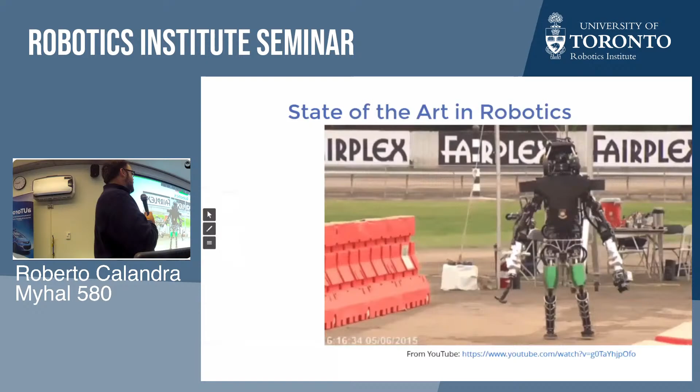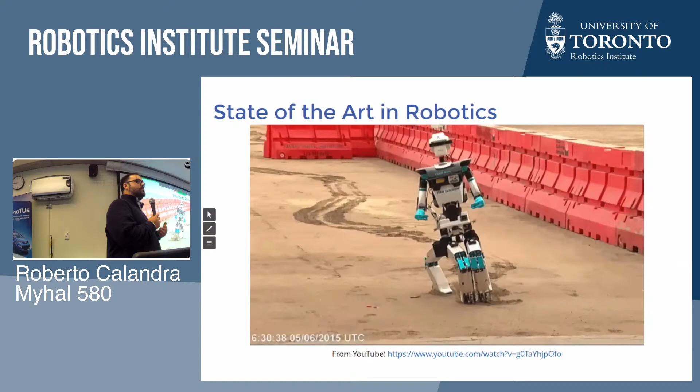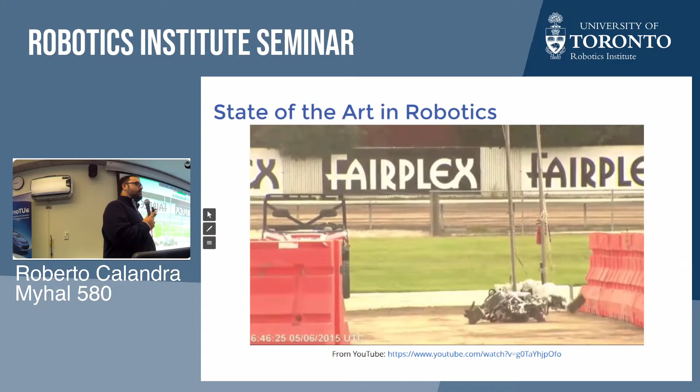However, if we look at what is the state of robotics nowadays, this is a video taken in 2015 from the DARPA Challenge. The DARPA Challenge, for those who don't know about it, was the most competitive robotics big challenge, and there were dozens of the best teams in the world spending years and years, in some cases with teams of hundreds of people, working on having these complex robots essentially be able to solve some sort of task and go through some sort of path with different obstacles.

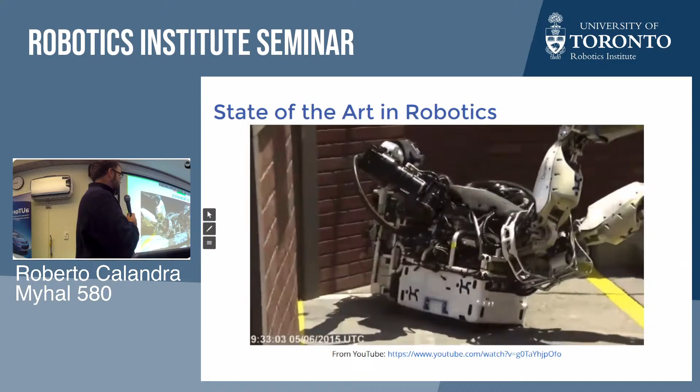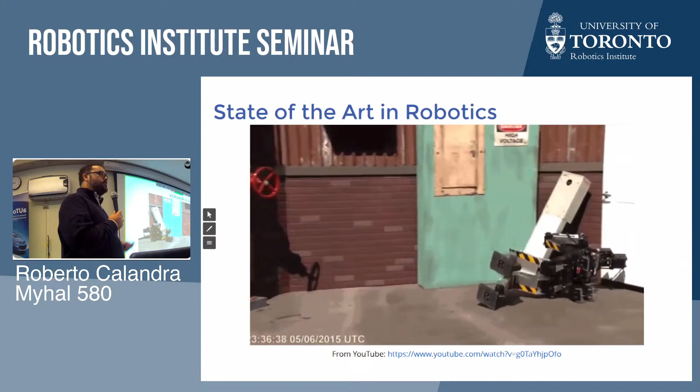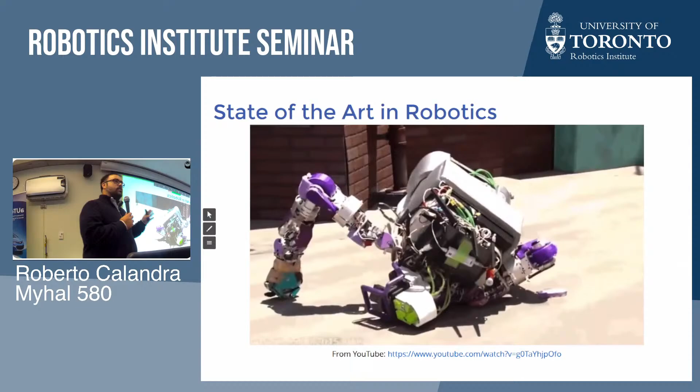And if we now look at this type of robots and their behaviors and their failures, this is qualitatively stupid. Any kid that is 3 years old is not going to fail in this type of silly ways as these robots are doing. And now all of these robots are really the state of the art of what we can do today, meaning 5 years ago. But how can we move beyond that?

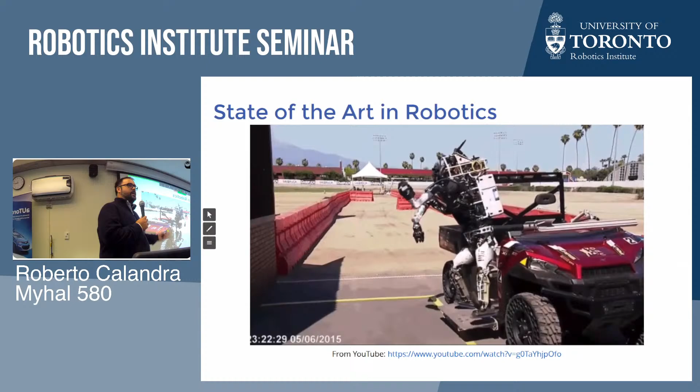How can we have systems that are more intelligent, are more adaptive, and can do better? I believe that in order to have robots ultimately being used in a wider number of environments, including homes, we need robots that are capable of adapting. We need robots that are more secure, that can interact in a meaningful but also safe way with humans. My personal opinion is that machine learning is an excellent tool to go beyond the state of the art and make robots smarter and more useful in the real world.

There are a number of challenges we need to address to achieve this type of high-level goal. These challenges are spread, in my opinion, across the whole spectrum from hardware to the control scheme we use, to the type of high-level planning and software we employ for decision making.

Some of the topics I'm generally interested in include multimodal sensing, hardware design, and adaptation to new tasks. Some of you might be familiar with my work on model-based reinforcement learning, but today I'm instead going to talk about a different topic, which is touch sensing, as a way to include multimodal sensing and provide robots with more information about the world in which they operate.

So let's talk about touch. Touch is probably the most important sense that we use in our everyday life, although we barely realize it. Touch is not only the most ancient of the senses that developed throughout evolution, but it's also the sense that allows us to measure forces.

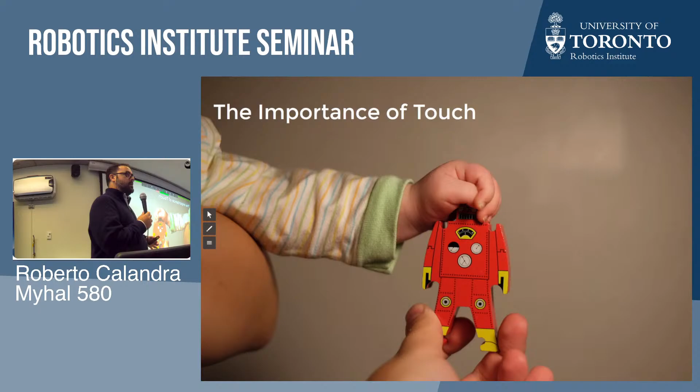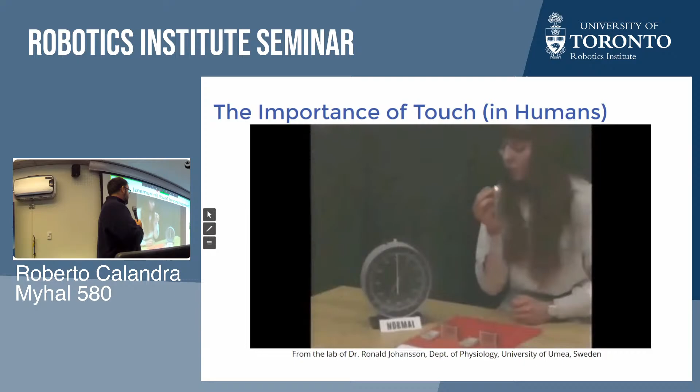We have a lot of evidence from physiology that touch is important in humans, and without touch, we fail. This is a video from Ronald Johansson's lab, where they would ask people to solve very simple tasks, and then anesthetize their sense of touch while keeping their motor control capabilities. Suddenly, very simple tasks like lighting a match would become extremely difficult.

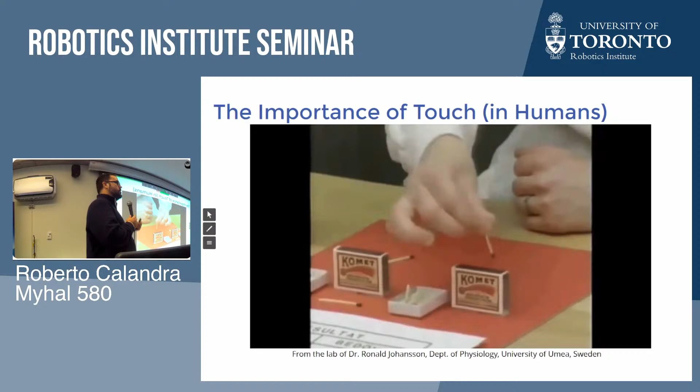The reason is because although we don't fully realize it, we do use touch extensively in our motor control capabilities every day, from lighting a match to searching for your phone at night in the dark.

So what is the problem of touch? Why don't we have touch in every robot that is produced and sold nowadays? The reason is because historically, touch sensing is a very hard field, and it's intrinsically an interdisciplinary field that goes along different levels of our essentially vertical stack.

Because you have hardware design of sensing, of tactile sensors, then you need to process this information, you need to integrate this sensor modality into your control scheme, and ultimately you need to use it in an application.

Historically, different labs, over the last four decades, have been focusing at different levels of this vertical stack, but nobody has really been able to work on all of this, simply because it requires a huge amount of expertise for a single lab, and because there is virtually no reusability in the solutions we currently find in tactile sensing technology.

In most labs, there are hundreds and thousands of really cool prototypes of tactile sensors that maybe one was built during a PhD, and then it would just sit on a shelf, and nobody else would ever use it again.

This is, of course, not a good thing for science, because it doesn't enable researchers to build on top of other people's work, and we essentially keep reinventing the wheel over and over again.

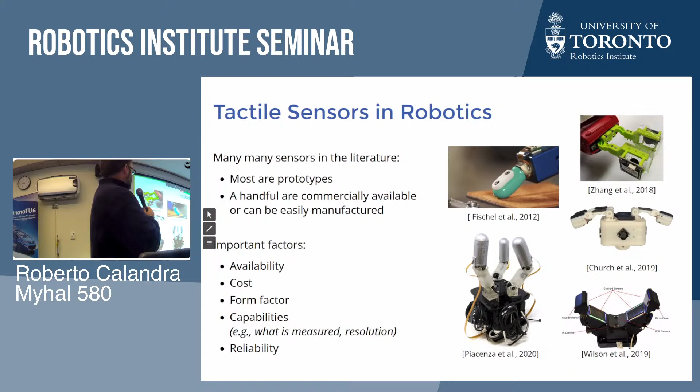The type of technology I'll be talking about today mostly falls under the concept of vision-based tactile sensors. This technology was proposed already in the 70s and 80s, but was recently rediscovered and made more popular by the work of Ted Adelson at MIT. The basic idea is very simple.

We essentially have a piece of silicon or elastomer, and below this elastomer we have structured light, typically RGB LEDs, that shine onto it. Whenever contact happens between the elastomer and an external object, this deforms the elastomer and creates shadows of different light and color patterns and cues that are recorded by a camera inside the sensor.

This technology is great because it has virtually no moving parts compared to capacitive or resistive technologies used in the past. It's also very cheap to produce and fairly robust, because the only part in contact with the external world is a piece of silicon, and we know fairly well how to make silicon that is hard enough.

Using this type of technology, in 2020 we designed an open source Digit sensor, which is the first mass manufacturable, low cost, and high-resolution vision-based tactile sensor. This sensor was really designed with the idea that we want to democratize touch, and as such it was designed to be extremely easy to build.

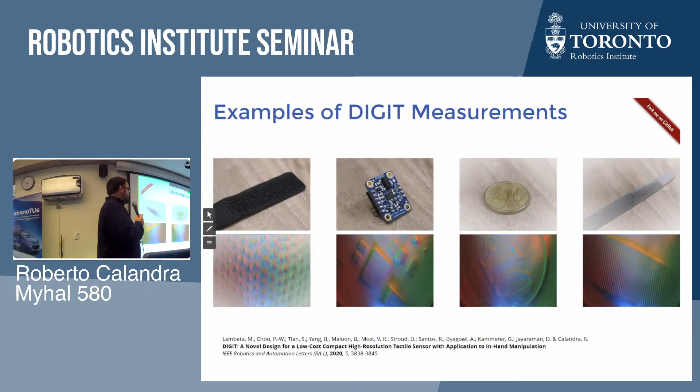Even so, building it at home requires some level of expertise in practice. We've already seen over 20 universities replicate our sensors, but something we're extremely proud of is that last year we partnered with a startup called GelSight Inc.

We partnered with them to actually commercialize these sensors. So everybody can now go to the GelSight website and buy one for $300. In the first 10 months, they sold over 1,000 of them, making Digit the most sold high-resolution tactile sensor in the world.

This is really pushing more and more researchers to work in this field, because now working with tactile sensing, even if you do machine learning, is as easy as ordering something online, waiting for it to arrive in your mailbox, and then using it for whatever applications you care about. Now, once we have the hardware, the next level is simulation.

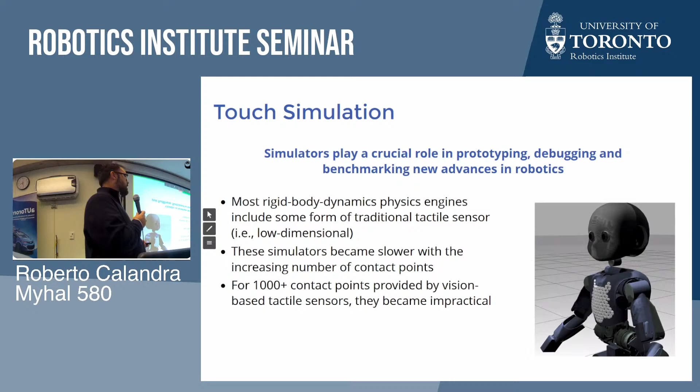So one of the things we did two years ago was open source a fast simulator capable of reproducing and simulating vision-based tactile sensors at hundreds of hertz, even for extremely high-dimensional output from the sensor. The nice thing is that it's not only open source, but it can also be plugged into physics engines of your liking. You can use PyBullet, Mujoco, or Isaac Sim, as long as you can extract the geometry of the object you're touching and the amount of force, you can plug it into the simulator and render your favorite vision-based tactile sensors very fast and very easily.

Now, this doesn't actually simulate or deal with the problem of how we simulate a flexible body and the dynamics of its interaction. But at least from the optical rendering point of view, this is an extremely nice simulator, and again, very fast and fairly accurate.

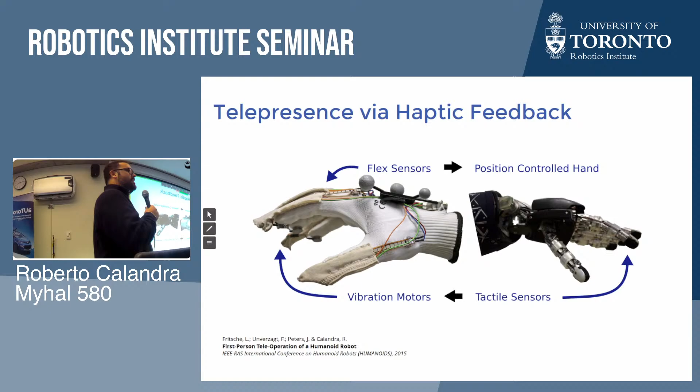Just to give you a cute example of a paper we did almost a decade ago, we had in Darmstadt during my PhD a full humanoid robot called iCub, where we were teleoperating through a very natural and intuitive setup, where the operator was looking through the eyes of the robot using Oculus Rift, and by moving its head was controlling the eyes and the neck of the robot.

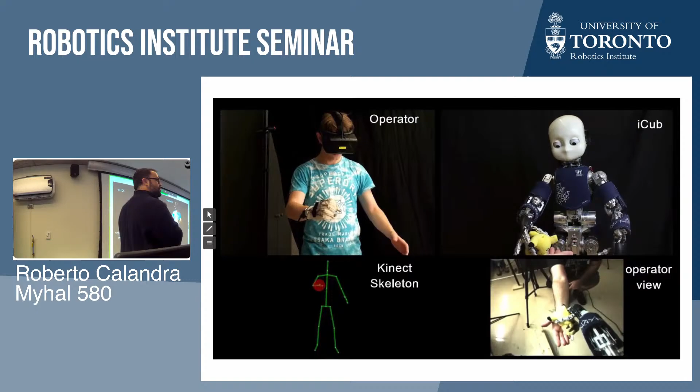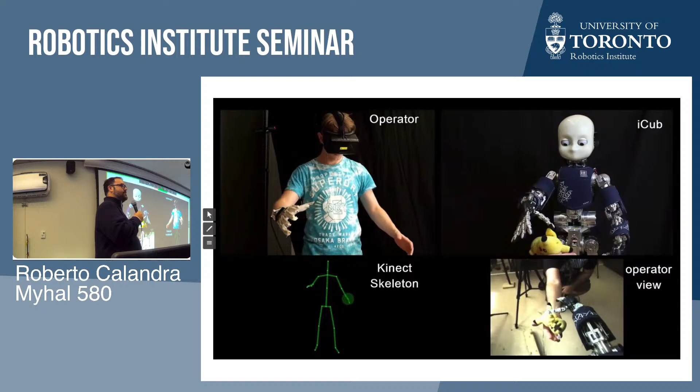We had very simple haptic gloves where you could feel through tactile sensors what the fingertips were touching on the robot, and at the same time control all the joints. Finally, through our Kinect, we were mapping the skeleton to control the rest of the whole body kinematics of the robot. This was done almost a decade ago, so with current technologies and sensors, I'm sure we could do much better, and of course many more people are working on this than me.

So finally, robot learning. I want to spend my very last slides talking about how touch is important for robots and how learning fits into this.

Over the years we've been working on a number of papers that try to use touch for different tasks. Some of these are like how can we predict whether a grasp is going to be stable, or how can we decide where to grasp or regrasp an object using touch. In these papers we have very strong evidence that using touch actually helps this type of grasping task compared to only using vision, quite substantially so in fact.

We also can imagine that touch is important to identify objects. If you are searching inside a drawer, you are able to recognize which object is which, or if you are searching for scissors, you can find them just by touch, and you can associate in your mind, oh, this is how it would look like.

And finally, active tactile exploration, both from just touch and from vision and touch. So how can I reconstruct the 3D shape of an object if I cannot see it, or if I can see it, but I can also have touch sensors that give me very high resolution information locally, in contrast to the global information that vision is giving me, but that might not be so accurate.

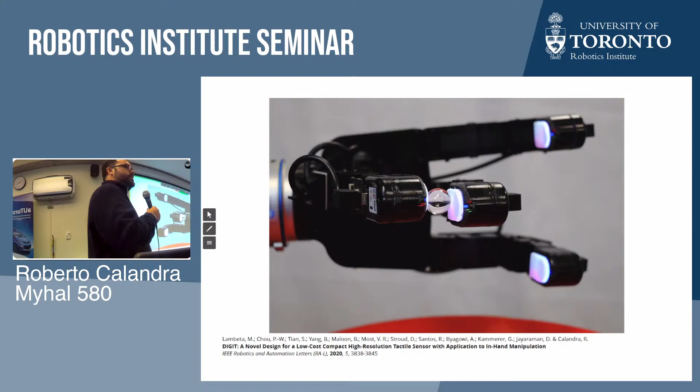The way we approach this problem is through model-based reinforcement learning, where we essentially learn, given two images of what we are touching, how these images are going to change into the future if we were to apply specific actions to the finger, and then we do the inverse optimization of deciding what set of actions will bring me closer to the desired outcome.

This actually works extremely well in practice, or well, fairly well. Sometimes it still drops the marble, but it has the capability of avoiding squeezing too hard and shooting the marble out, as well as losing the marble because you are not applying enough force.

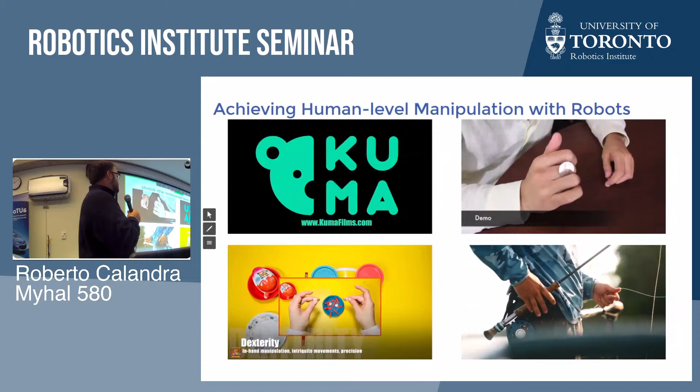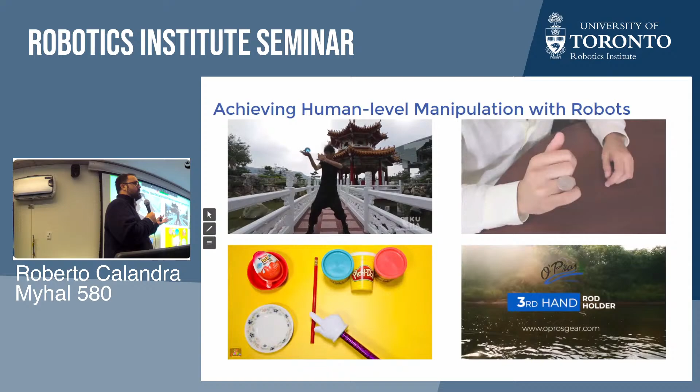Now, ultimately, what we would like to have in the future is to be able to reproduce the dexterity of human hands. This will require both the design of better hardware for robotic hands, but it's also likely to require better tactile sensors to be able to sense the state of the world and the interactions and forces we have with different objects.

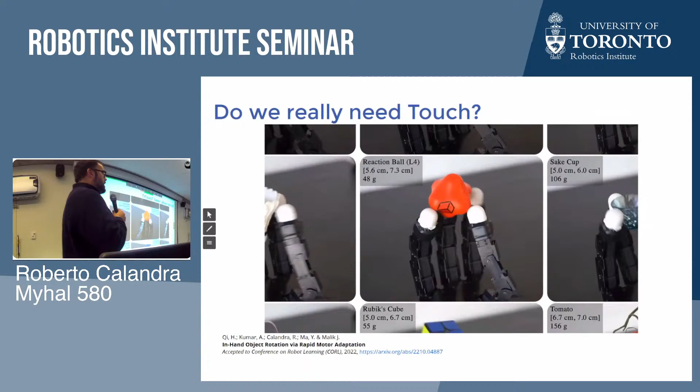However, as a counter-argument, you could think, do we actually really need touch? Just two days ago, we released a paper where we essentially learned how to manipulate and rotate in hand a few dozen different objects, but just using sim-to-real, without the use of any tactile sensor information, without the use of any vision information, just through proprioceptive feedback.

Although this is an extremely interesting result, because it really shows how far we can go with manipulating objects just by using finger position information. But it also shows very clear hints of how we can make this better, because there are obviously corner cases where the hand is not able to recognize the geometry of the object it's touching, and that's where we will need touch, and also for tasks that are more dynamic.

Question: Does this case have torque feedback? It has feedback, but it's not torque feedback, it's position feedback. So it doesn't even know about forces? Correct. Well, you could argue that indirectly through the position, and knowing your action, which is also position, you can reconstruct the torque, because the underlying controller is a PID, so you know the commands. But yes, technically speaking, it's position control. And this is online, so if you're interested, you can go and read it.

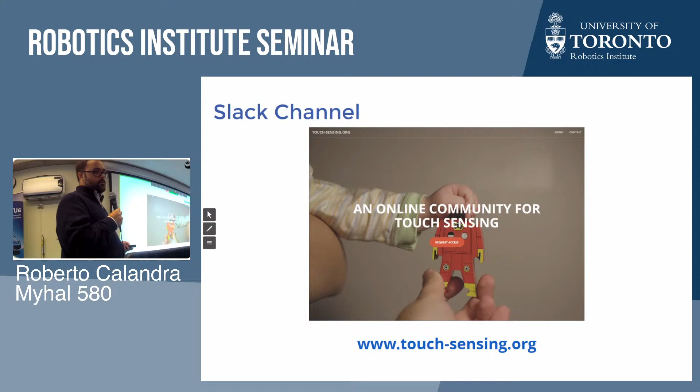And I really want to thank all the collaborators that have been working with me on this over the years. All of this work is possible because of the amazing collaborators that help you every day and keep you going even when you don't like it, or sometimes you wake up depressed. In particular, I want to thank Mike, who has been leading some of the technical efforts on the design of Digit and of PyTouch. He's been my partner in crime for the last couple of years on touch sensing.

So to conclude, what I hope I conveyed today is that touch is a key sensor modality, both in humans and robots. Over the last few years, we've been trying to create an open source ecosystem that can hopefully reduce the entry bar for new researchers in the field and help simplify perception, understanding, and interaction through touch. As part of this ecosystem, we now have cheap, reliable hardware, fast simulators, and machine learning libraries that can be used for processing the raw information from the hardware.

We have really been aiming to grow and support the community in their effort to further this field and accelerate research, with a long-term goal of making touch sensing practical and useful in the real world. Ten years from now, I would like every single robot on the planet to make use of touch and have capabilities that are not possible today from vision and proprioceptive inputs alone. So thank you very much, and I'm happy to take questions.

Also, thank you very much for the great talk. About the sensor, how sensitive is it? How much force do you need to use, or how much deformation, for it to detect? So the question is how sensitive is the elastomer and how much force can the sensor sense. The answer is that this is actually up to you, in the sense that the sensor is designed to be... let's see if I have a backup slide. Yes, okay. So the elastomer is very easy to change. There is a single screw that allows you to replace the gel. This is useful for wear and tear once the gel wears out, but it also enables you to use a gel that is specifically tuned to your application.

Every particular gel can be designed to have a different dynamic range. Depending on whether you want to do very fine manipulation of small screws, you want a gel that's more sensitive. If you want to do something like picking up rocks, you need a gel that's more reliable and able to sense higher forces. The sensors sold by GelSight are roughly tuned in the order of newtons, equivalent to what a human finger senses in everyday manipulation. But you can make it more or less sensitive depending on the specific application you care about.

Yeah, so my question is a bit broad, I apologize in advance. You've been comparing touch with vision and audio, and one key difference is that with vision and audio, when you record data with your sensor, it's almost trivial to bring it back to an intuitively interpretable form—you record with a camera and put it on a screen to see it. That can induce a bias in how you use the data, and I guess it's more complex with touch. How do you think that's going to affect the development of touch as a sensor in robotics?

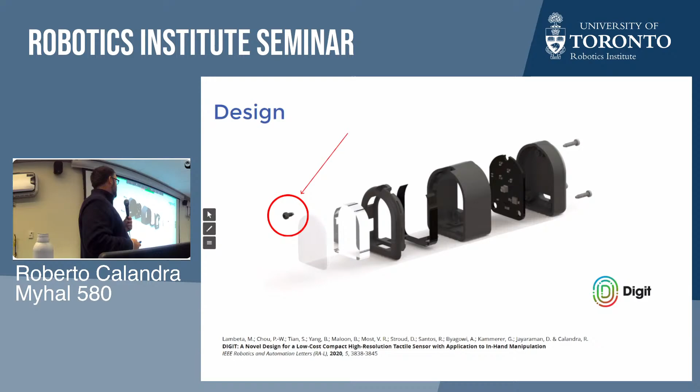Now, I completely agree with you. I think part of the problem is that at the moment we have very good tools to reproduce vision, like a screen, and very good tools to reproduce audio, like a speaker or your phone. With touch, we don't have such tools yet. I think at some point in the future, hopefully the haptic community will give us better tools to reproduce touch onto our fingers. But until then, I completely agree that if we look at an image from a tactile sensor, it's not obvious how this is interpreted.

Now, to a large extent, this is an image, and the best answer I can give you is that if we use machine learning, in many cases we don't necessarily need explainable outputs from the sensor. If you only care about predicting whether a grasp is successful or not, ironically, with such high-dimensional input, the model you train with machine learning might actually be better than a human at recognizing what's happening. Part of this is that as humans we can recognize fairly easily the geometry of what we're touching, but we don't have a good understanding of how this geometry corresponds to force, whether it's shear forces or just normal force.

And part of this is because the format of these images is not very human-friendly. So something we often do, for example, is compute the difference between the sensor without touch and the sensor when it's touching something. This is a little bit more interpretable for a human, but not quite as good.

Ultimately, there are also other labs, so one question is really: what are the types of features that we want to get out of this sensor? This is an open question. Other labs—we use mostly raw images because we have a machine learning pipeline—but for example at MIT they like to use optical flow, where they have markers and compute how these markers move. This is also not very interpretable, but it depends on your pipeline and what you care about.

Going forward a couple of decades, what do I think about skin? My hunch is that this type of vision-based tactile sensor technology isn't mature for skin yet. The main problem is that the way we do the sensing with cameras requires some space between the cameras and the elastomer for the camera to focus. I think this is a technological problem, and maybe in a decade or two we'll solve it and be able to squeeze the optics together with the elastomer. But the minimum size you can achieve nowadays is about 1.5 centimeters, and that's not going away immediately.

There's also a more philosophical question: do we even need this type of high resolution on the skin? If you think about the human body, we have skin in a lot of places, but the resolution on the back compared to the resolution of our finger is a tiny fraction. There are psychological tests where people touch your back and ask what object this is, and it's extremely hard for people to tell because they don't have that many sensors there.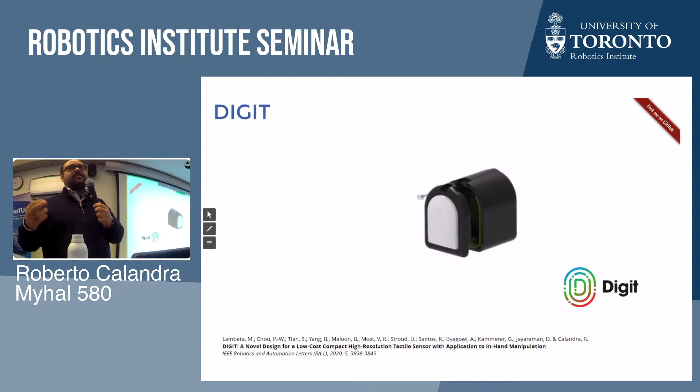So I think it's likely that in the near future we'll keep two different technologies: for the fingertip, you probably want something like a vision-based tactile sensor which gives very rich, detailed information, while for the skin you want something with maybe a fraction of the resolution but easy to manufacture in large patches, and you just integrate the two types of sensors.

In this spirit, at Facebook there's another researcher, Tess Hellebrekers, who has been working on making skin, and there's a paper called ReSkin where they detail the design of a low-cost, reusable skin that can be produced for large patches. It doesn't quite have the same resolution, but as I said, you probably don't need that for the whole kinematic structure of the robot.

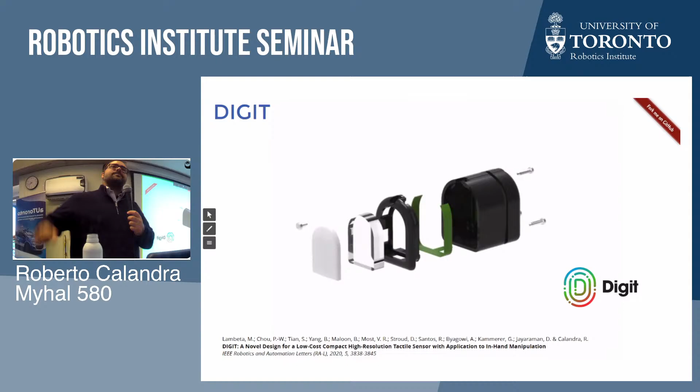One more forward-looking question: for tasks we can't do right now, like tying a knot in a thread or some sewing task, do you think the perception side is solved and we just need better actuators, or do we still need improvements in touch sensing technology? I think that for most tasks, having tactile sensing will help.

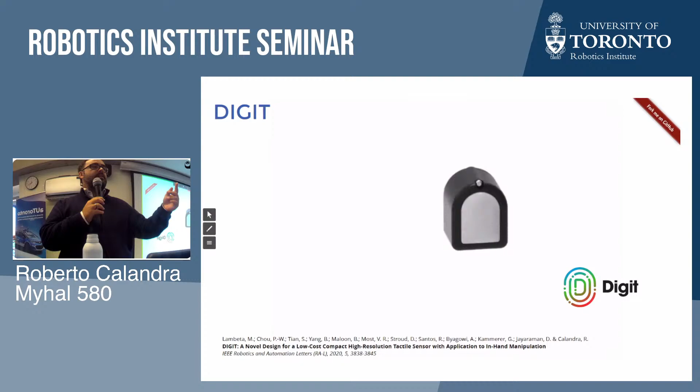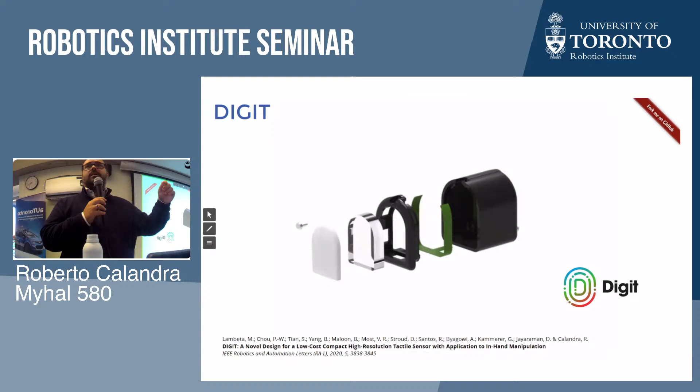Tasks that involve interaction and fine manipulation. One limitation of the sensors you've seen, like the Digit, is still the form factor. In my personal opinion, we're still a little far from the form factor of a human finger. It's still a relatively bulky sensor, and it doesn't have the nice curved surface that a human finger has, so some tasks that require this curvature are probably difficult with a Digit.

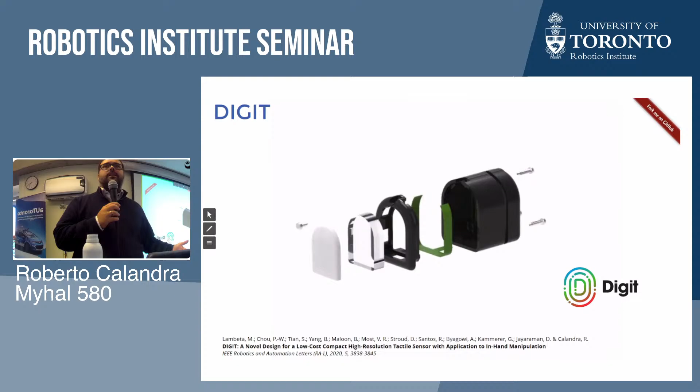But I do think that in the coming years we'll get there, and if I think five years into the future, it's likely we'll have a sensor the size and shape of a pinky. It's mostly a mechanical design problem, which is super hard, but solvable, I think, with current technology.

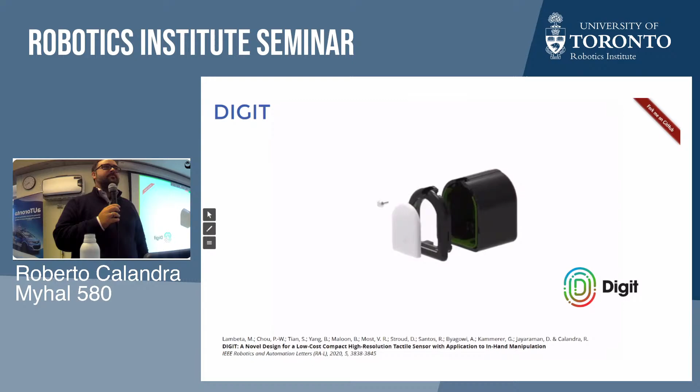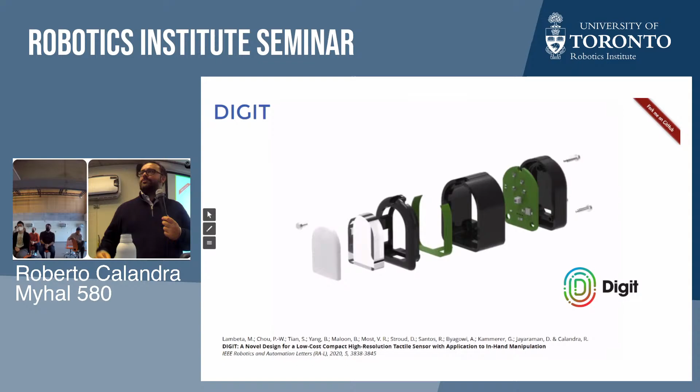I don't know if there are any questions online or a way to check. There are any questions? Okay. You had good viewers online, but they were just very quiet.